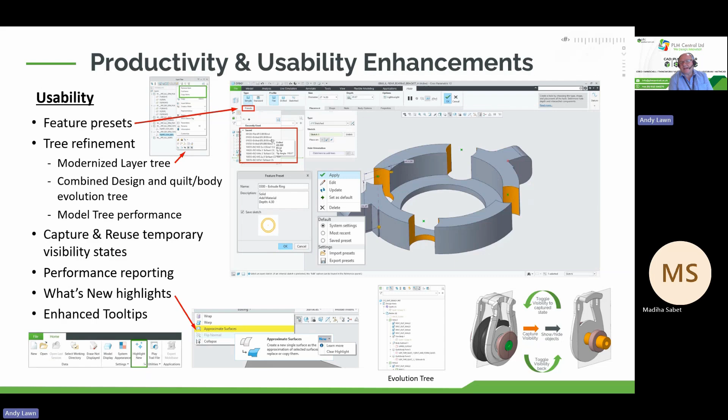A great example of this would be holes. The user can define his most common holes as a preset. For example, a user perhaps has 3 main types or sizes of holes that he uses most often. The user can capture all the settings for the 3 holes and will be able to quickly place and reuse them with just a single click. This is not only for the user, but this can also be shared with the entire organization, enabling greater reuse and design standardization.

Multi-body design keeps getting more capable in Creo 12 and is becoming a really practical way to work with the master model approach. Instead of juggling multiple parts in an assembly, you can build everything as one part made up of different bodies. That makes it easier to explore ideas in a single space, and when the design is finalized, you can then still break it down into its individual parts.

To simplify the process, Creo now lets you generate an associated assembly structure directly from the master model, saving a lot of manual effort.

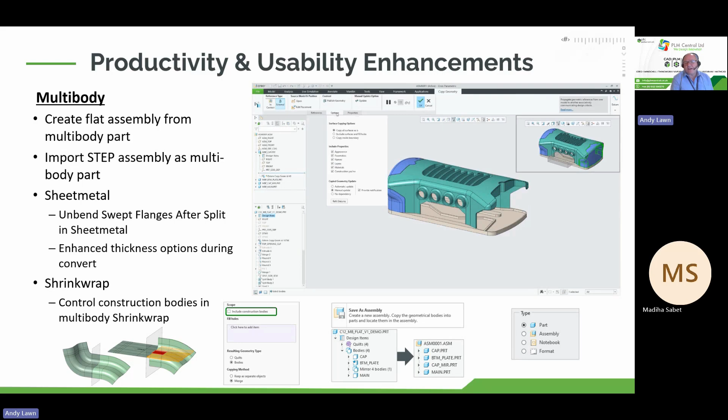Another common scenario when working with Creo is supplier components. These often come in as STEP files set up as assemblies. Most of the time, though, you don't want to deal with every single part - you just want one file and one part number. With Creo 12, you can now import STEP files as a multi-body part, getting all the geometry without the overhead of managing dozens of unwanted components.

On the sheet metal side, multi-body support is growing too. The sweep flange feature has been expanded, and there are now options for controlling thickness during conversion. Finally, shrink wrap has been improved with more flexibility. You can now decide whether or not to include construction bodies in the shrink wrap, giving you more control over how lightweight models are built.

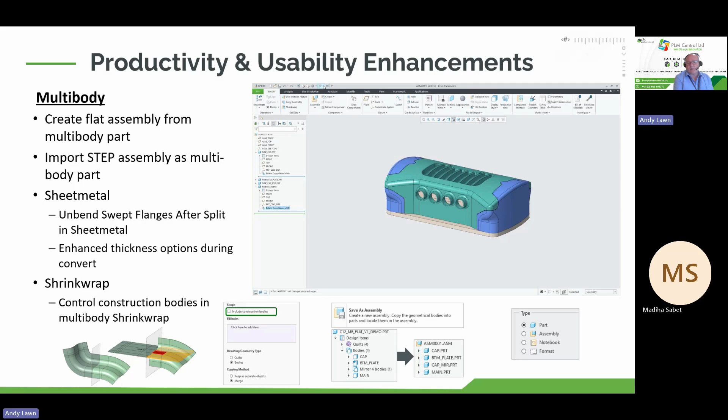Creo 12 brings some solid improvements to existing features. In sheet metal, there's now a fully dependent mirror feature, and the join command has been expanded to handle multiple walls or bodies at once. Before, everything had to be touching, but now Creo will automatically extend the walls so they intersect and then connect them with a bend. This cuts out a lot of manual cleanup.

Another request from customers has been better ways to capture the minimum size of a product for shipping and packaging purposes. To help with that, the enclosure volume feature now sits in the footer of the model tree. This means it always updates with the latest dimensions, and it can even be added to the start part so you don't have to think about it later. Those values can also be pushed into Windchill as parameters, ensuring there's always an up-to-date size available across all parts.

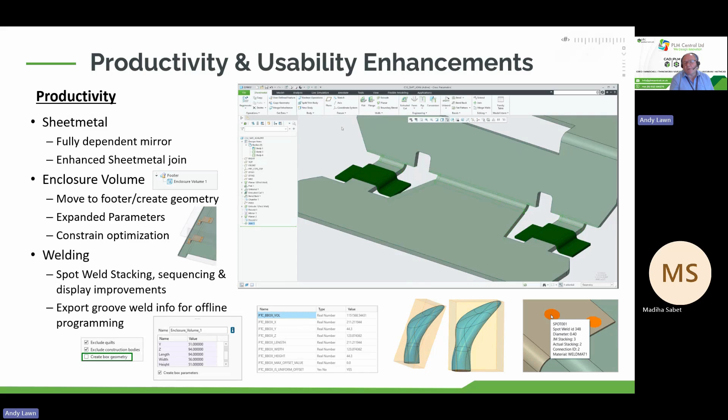On the welding side, Creo 11 introduced spot welding workflows using joint members. Creo 12 builds on that with new ways to manage products with a lot of welds. Weld export has been expanded to include groove welds in addition to fillet welds, making it easier to generate data for offline programming of welding robots.

Creo 12 continues to expand its surfacing tools. The style feature, a type of super feature that can hold curved surfaces, trims and more, has been expanded so you can now reroute and replace entities inside it. That makes design changes faster and simplifies the back and forth of rebuilding geometry.

Connection handles in both style and freestyle have also been updated to match the look and behavior of those tools, like boundary blend, making them more consistent and easier to use. On top of that, both boundary blend and curve through point have been improved to deliver smoother, higher quality surfaces and more predictable results when you make changes.

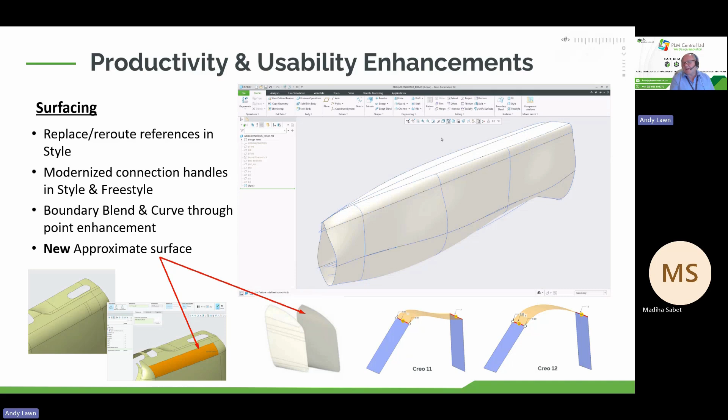Another area that's been addressed is cleaning up surface patches. Anyone who's worked with imported geometry knows the headache of dealing with tons of tiny, unnecessary patches that complicate the model. Creo 12 introduces an approximate surface feature that lets you replace multiple small patches with a single smooth surface, keeping the shape and connectivity intact while reducing model complexity and speeding up the workflow.

Sustainability is a bigger priority for most companies, and that starts right at the initial design stage - understanding what materials are being used and what their impact will be. Creo 12 adds a direct connection to Windchill, so material usage and quantities can be shared and managed as objects in Windchill. That link makes it easier to tie into lifecycle analysis tools, helping teams better evaluate the environmental impact of design decisions early on.

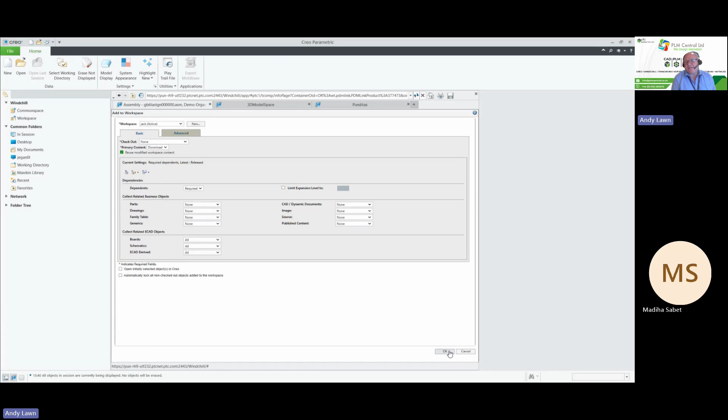Performance has also been improved when working with large assemblies from Windchill. Users can now define a design context with just the components they actually need to work on and pull the subset directly into Creo. Instead of retrieving the entire assembly to check dependencies, Creo now only brings in the relevant data - the result is much faster retrieval times and a quicker path to getting the real design work done.

I'll just let this demo finish because it's opening the subset and you can see it's a lot faster. Moving on.

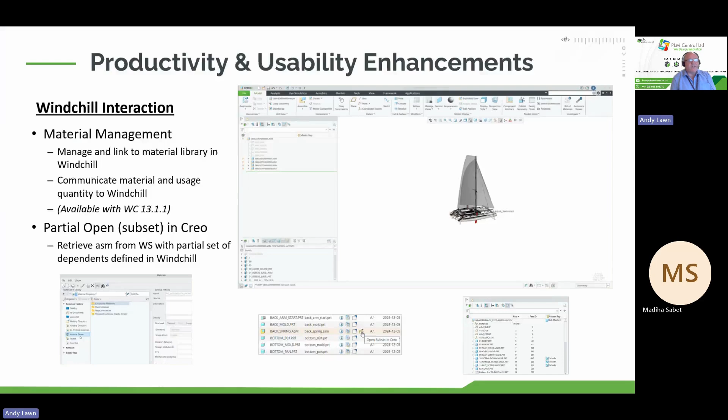Creo 12 marks the third release of Composite Design Solution, and each version has added more capability and efficiency. In Creo 11, zone-based plies made it easier to work with models that had large ply counts. Creo 12 takes that further with automatic merging of neighbouring plies - if two plies share the same material and orientation, the system combines them into one, cutting down on manual cleanup.

Usability has also been improved. For example, the transition tool can now apply transitions across multiple edges at once, saving time on repetitive setup.

Another addition is the laminate reference model, which works similarly to the manufacturing reference model, where the manufacturing part would be inherited from the design part. It allows changes needed for the manufacturing without altering the original design model. A good example of this would be the difference between a casting model and a finished machine part.

The biggest leap, though, in Creo 12 comes from performance. Building the final solid model from composites is now much faster and more robust than before, setting a new benchmark for speed without sacrificing accuracy or detail needed to properly represent each ply and drop-off.

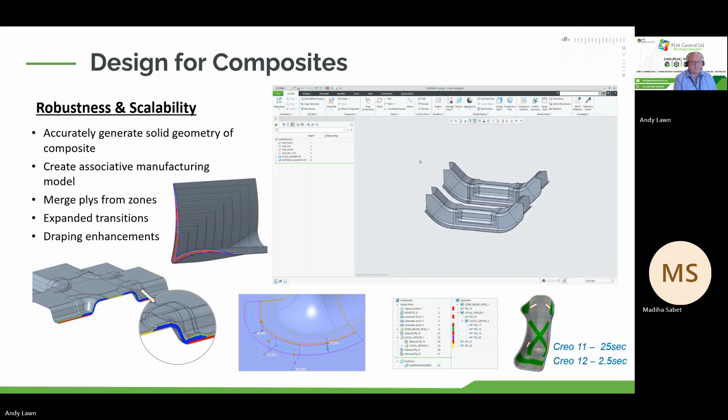Design for electrification. Designing modern products means dealing with more complex electrical systems than ever before. Many of today's machines, vehicles and devices contain miles of wiring, which also makes the design process more demanding and requiring a more collaborative approach. Creo 12 helps tackle this challenge by bringing its well-known strengths in assembly design into cabling and harness work.

Instead of treating the harness as a single part, Creo now handles it as a full assembly, with spools, wiring, terminators, and more. So teams can now work together using the same tools and workflows they already rely on for mechanical assemblies. This shift makes it easier to reuse standard elements like spools and cable types, while also keeping everything organized and reportable. Harness information can be managed in Windchill, making it straightforward to generate a complete harness bill of materials.

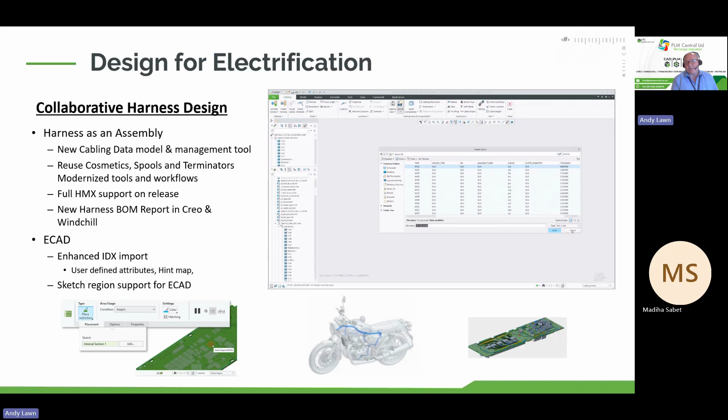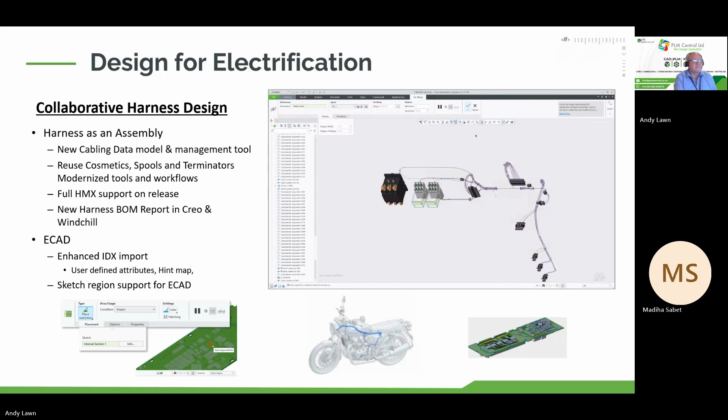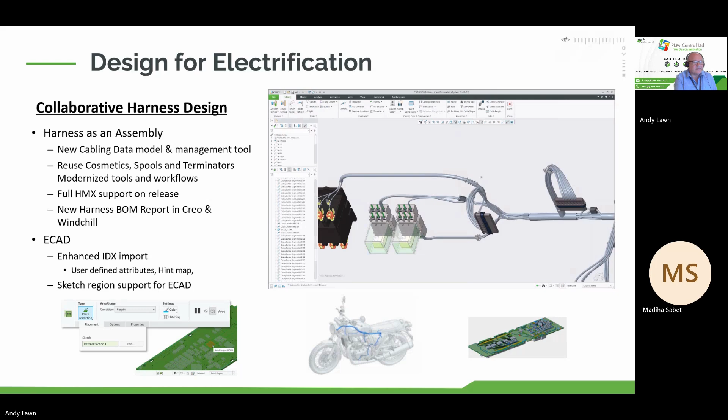On the ECAD side, Creo has also added support for user-defined attributes in the IDX format, and also introduced sketch regions for ECAD boards, further smoothing the collaboration between electrical and mechanical design. I'll just let you watch the end of this demo. And that's a completed demo.

Simulation-driven design. Simulation continues to play a bigger role in design, especially as teams look for ways to explore ideas and optimize earlier in the design process. Creo 12 expands on its integration with ANSYS, bringing in the latest solvers and making it easier for engineers to use simulation as part of their everyday workflow.

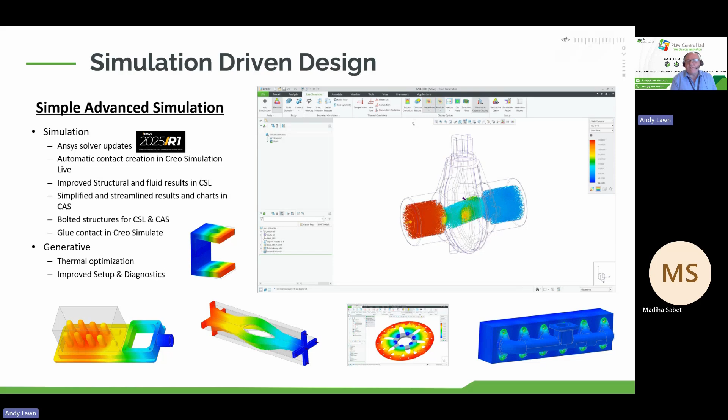One focus has been simplifying results across Simulation Live and Creo ANSYS Simulation, so users can interpret findings more consistently. To cut down setup effort, Simulation Live now automatically creates contacts, which also helps reduce the chance of human errors. Both Simulation Live and Creo ANSYS Simulation also give support for bolted structures, opening up a much more realistic analysis for common assembly types.

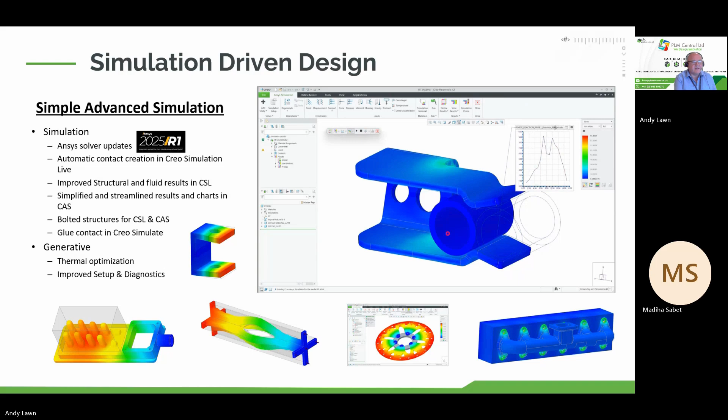On the generative design side, Creo now supports thermal optimization. That means engineers can generate concepts that account for not just structural or modal requirements, but also for heat dissipation, an increasingly important factor in many designs. And we'll move on to the next: model-based definition.

Creo 12 builds further on its model-based definition tools, helping companies make the shift towards a more connected, model-centric workflow. By keeping all product information directly in the 3D model, teams can reduce errors and strengthen their digital thread. This release expands support for STEP AP242 and now includes 3D PDF export, making it easier to share model data across different platforms. Annotations can now be reused across models, regardless of the annotation feature they were created in, cutting down on repetitive work and improving efficiency.

Performance has also been refined. Combination states handle larger sets of elements more smoothly, and switching between states no longer triggers unnecessary regenerations. Both GD&T Advisor and EZ Tolerance Analysis have been updated to cover more scenarios, with support now extended to datum reference features and intent surfaces.

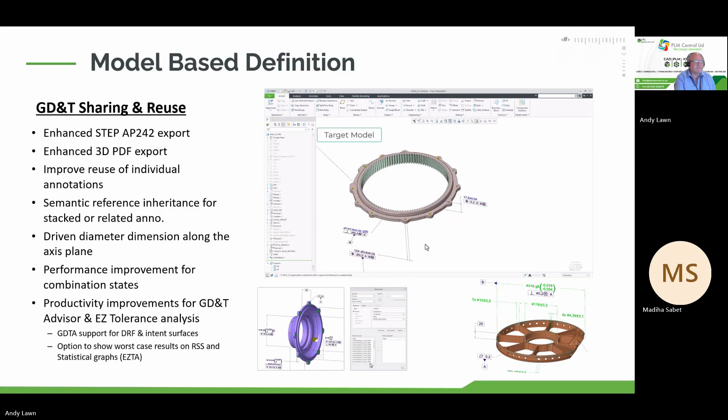Design for manufacturing. Now turning to manufacturing, Creo 12 continues to expand both additive and subtractive capabilities. More companies are turning to additive manufacturing to create mold tools, and Creo 12 introduced a new conformal cooling feature. This automatically generates cooling channels that follow the shape of the part, helping the mold cool more evenly. The result: faster production times and longer tool life. These channels are usually made with additive manufacturing, and you can control their shape to make the printing process smoother.

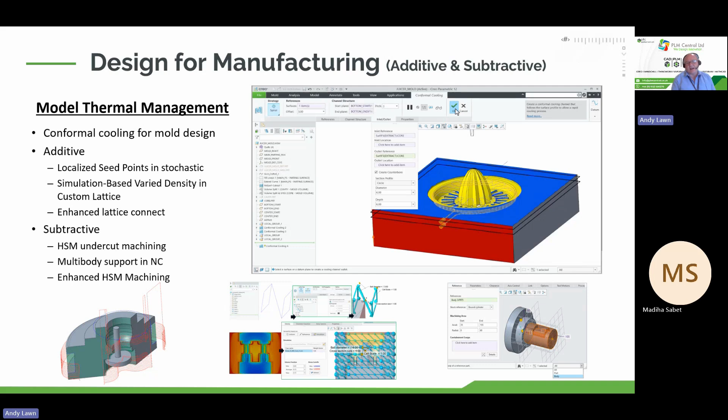Lattice creation and optimization has also been improved. You can now create custom lattices with variable density based on simulation results, which allows for stronger, lighter, and more efficient designs. On the subtractive side, high-speed machining continues to get smarter. Creo 12 adds support for undercut machining operations, giving more flexibility in 3-axis machining, and provides better control over multi-body parts in a manufacturing assembly. Overall, these updates make it easier for manufacturing engineers to work faster and more efficiently.

Okay, thank you. I hope you've all enjoyed what you've seen today. This was just an insight into the 250 plus amazing capabilities added in Creo 12.